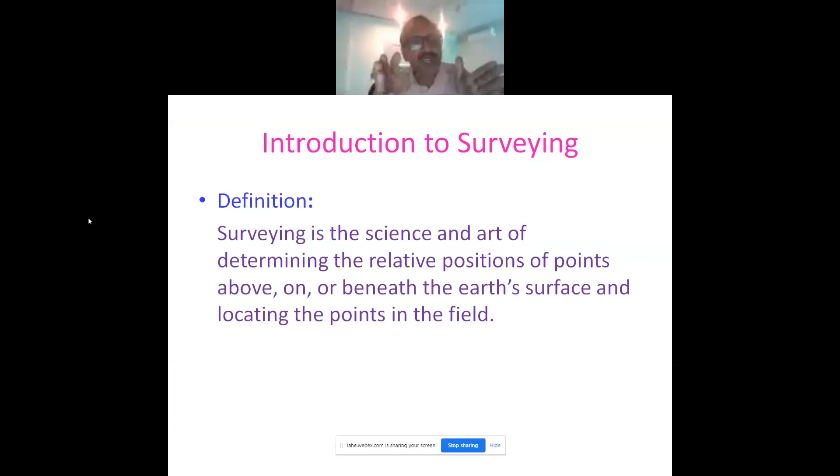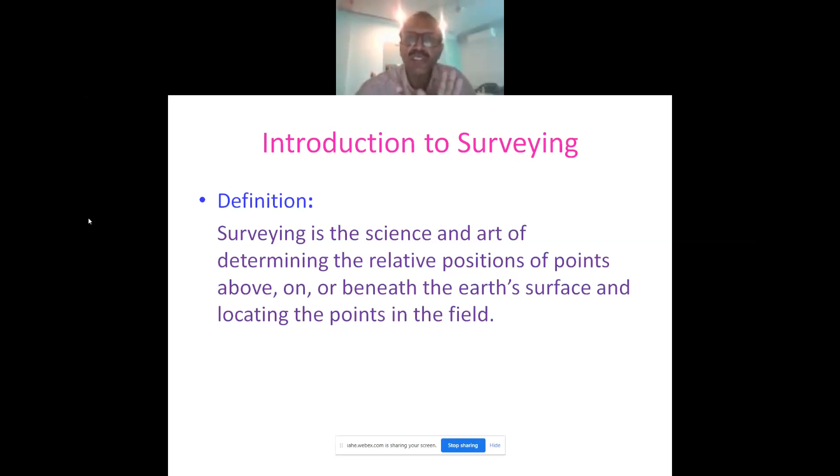If you have done good control points and good topography, your project will go smoothly. If there is a mistake in your control points and your topography, your project will always be delayed, because if you have not done proper control points, your alignment will be changed. And if the alignment is changed, the land acquisition will need to be changed, the cutting of trees will need to be changed, electrical lines will need to be moved from one place to another. So many things will be delayed in the project. So if you have done good control points, your alignment will go smoothly.

If you have done good topography in the field, good topography means you have collected each and every field factor. Otherwise you have to change the alignment, you have to reroute the road. So this way, if you have done good topography, meaning you have collected each and everything from the ground, your design will be very perfect, so your project will go smoothly.

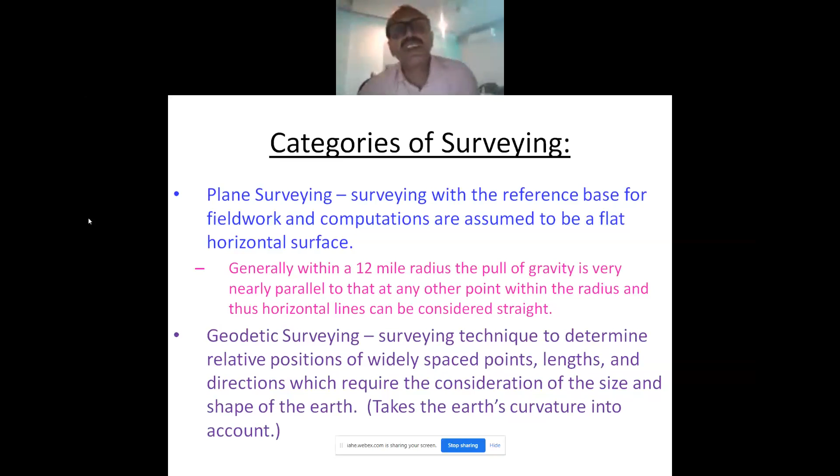Survey methods: there are a few survey methods. One is photogrammetry. Photogrammetry means we have to take the photograph from two different directions. Both photographs overlap each other, then you will get the 3D impact of your area. So you will get the 3D picture. 3D picture means you will get the X, Y and elevation.

When both images overlap by 60 percent. This function comes from the human eye, because humans have two eyes. If you see through one eye, you will not get the 3D picture. But if you see with both eyes, then you will get the 3D picture, because one eye will take one photograph, the second eye will take the second photograph, and both will overlap each other.

3D. Same way in photogrammetry, in earlier days we were taking the photograph from the aeroplane and then overlapping it and then making the drawing. But nowadays we are taking these from the satellite. So we take the image from the satellite, the second image from a different direction. Both are overlapped, then we will get the 3D position. So this is called photogrammetry. We are taking the photographs.

Next is the boundary survey. This boundary survey is normally to collect the boundary points of each property holder. Like when we are doing the topography, when we are doing the DPR, we have to collect all boundary points of each owner. So we will get the area of that. Like if I collect the 7 points of IHE, we will get the area of IHE, that this much area IHE is having.

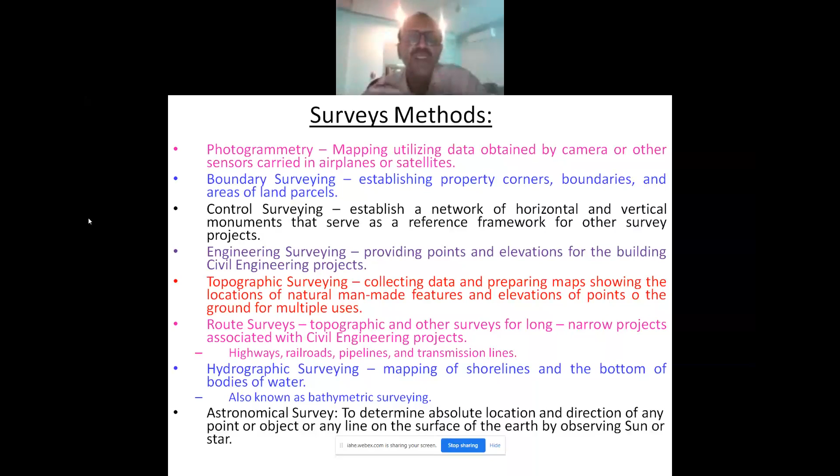The horizontal accuracy in the survey: in static survey by DGPS, accuracy of 5 mm plus 0.5 ppm times base length can be achieved. In traverse survey by total station, accuracy of 2 mm plus 2 ppm can be achieved with a 1 second total station instrument. GPS I need not explain much, because it is a distance error. Say at 5 kilometers, you have two control points at 0 and two control points at 5 kilometers, so the distance between these control points is 5 kilometers.

So in DGPS we achieve 5 mm plus 0.5 ppm. At 1 kilometer it is 5.5 mm, after 2 kilometers it adds 1 mm, at 3 kilometers 1.5 mm, and so on to 5 kilometers. The maximum error can be 7.5 mm. So your DGPS is more accurate.

But in total station, the accuracy differs, because a total station has two types of instrument: one is the EDM, the second is the theodolite, and their accuracies are different. The EDM, electronic distance measuring unit, accuracy is 2 mm plus 2 ppm. The 2 mm is the constant value: centering error, leveling error, mechanical error of the instrument. So 2 mm is the constant of the EDM, and 2 ppm is 2 parts per million, 2 mm per kilometer.

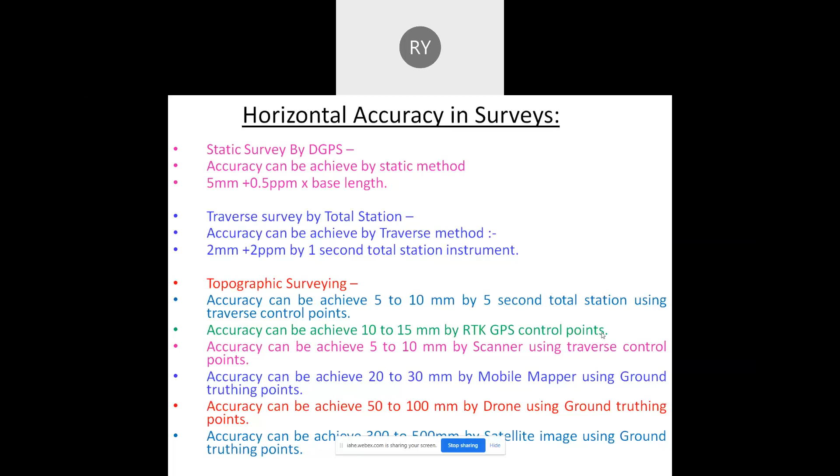Ground truthing points. Ground truthing means you have a control point, every 1 kilometer you have a control point. Whenever you are doing image rectification, you have a control point, you assign that control point value, and all your images will be corrected. Same way in the mobile mapper, you should have a control point. When the mobile mapper has collected the data, you can define that control point value, and your accuracy will be 20 to 30 mm. Same way your scanner: when you scan the area, if you have control points, you can use those control points. Your accuracy can be 5 to 10 mm.

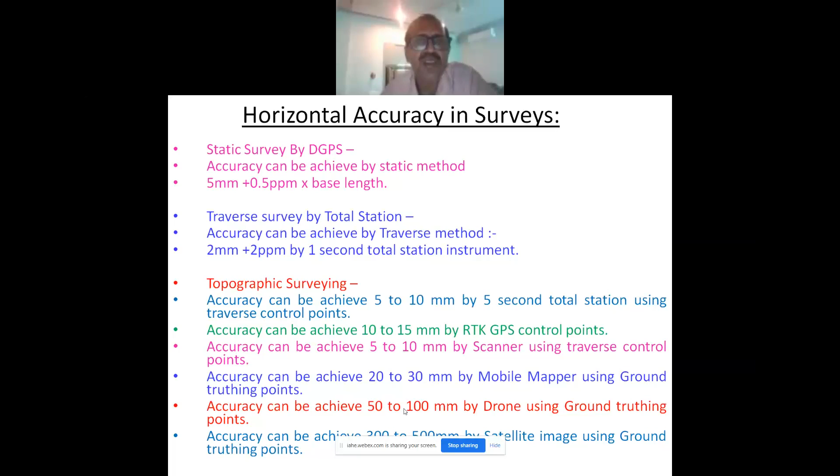So vertical accuracy in the static survey by DGPS instrument can be achieved as 5 mm plus 1 ppm times base length. That means in horizontal control it is 7.5 mm, but in vertical control it is 10 mm in 5 kilometers. But for vertical control, you should run at least 4 to 6 hours of observation. For horizontal control, 1 hour of static observation is sufficient, but vertical control requires at least 4 to 6 hours.

For fly leveling by auto level or digital level, the accuracy can be 2 mm or better, as per requirement or instrument. Like if your instrument has 2 mm accuracy, you will get 2 mm accuracy. If your instrument has 0.7 mm accuracy, you will get 0.7 mm accuracy. So it depends upon your instruments.

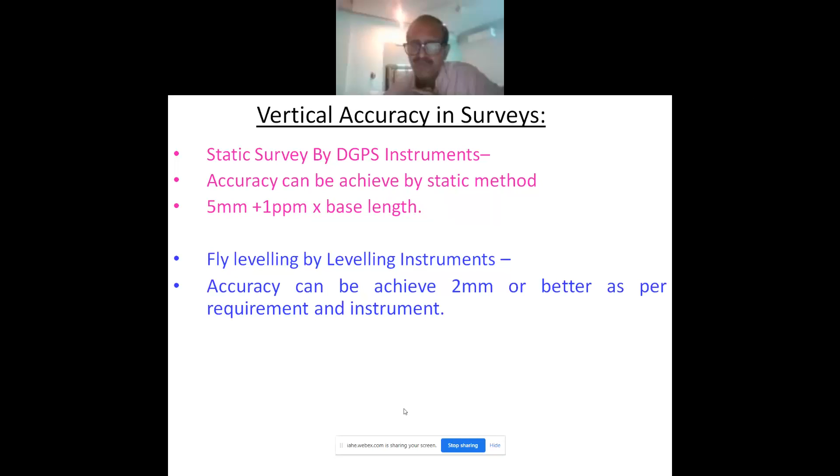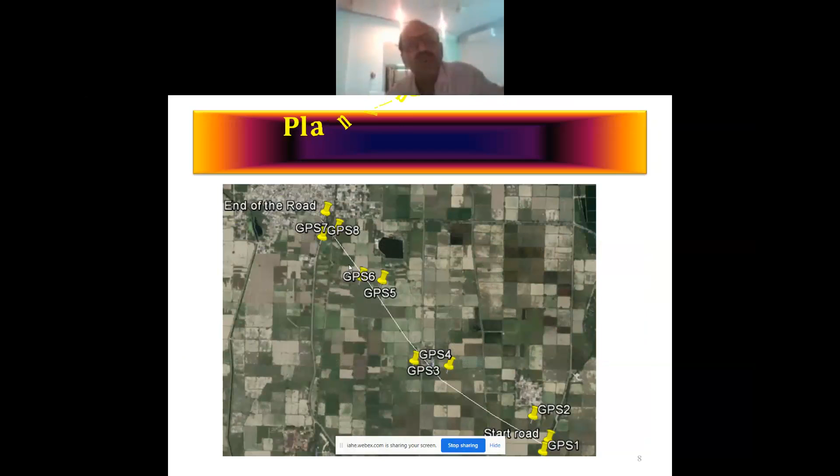For that purpose, we have just roughly aligned this on Google. Then we can recce this on the ground. Then we make a control point, like a GPS control point every 5 kilometers: 0 chainage is 1 and 2, 5 kilometer chainage 3 and 4, 10 kilometer 5 and 6, and 15 kilometer 7 and 8. Likewise, we can design the horizontal control points.

When we have designed these horizontal control points, then we can plan how to do the horizontal control, because we have two types of method, traverse method and triangulation method. So we run with the triangulation method. 1 and 2 are GPS, this is a temporary point. So we make this triangle 3, 4, 1, 2 and T point, then T1 to T2 this triangle, then 5, 6 to T2 this triangulation, then T2 to 5, 6, T2, T3, then T3 to 7, 8 and 5, 6.

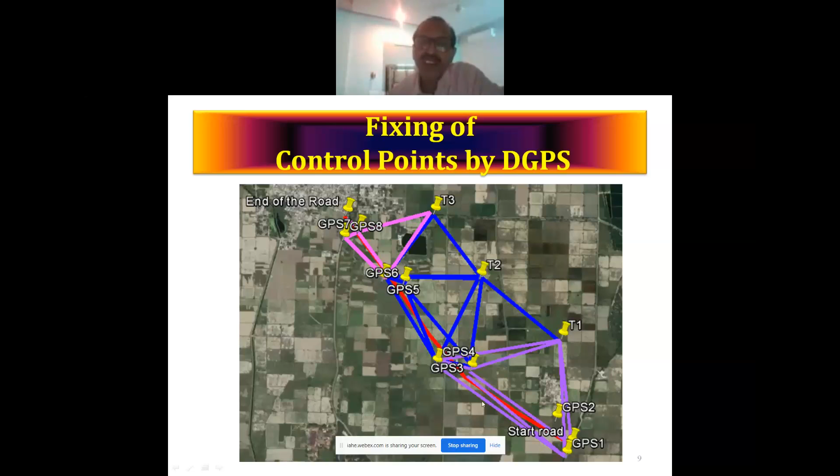If you make this triangle, your alignment will not move left or right, because this will not allow it to go out and go in. So your horizontal control is very accurate. With respect to these control points, now we run the traverse in between these points with the help of a total station. So we run that; these are the traverse points.

Now we have TS2 and TS3 as control points on the ground. We mark something; likewise, here is a bridge. In between TS2 to TS3 is a bridge. So we can use these two control points, and we can mark the center line of your bridge or the center line of your road.

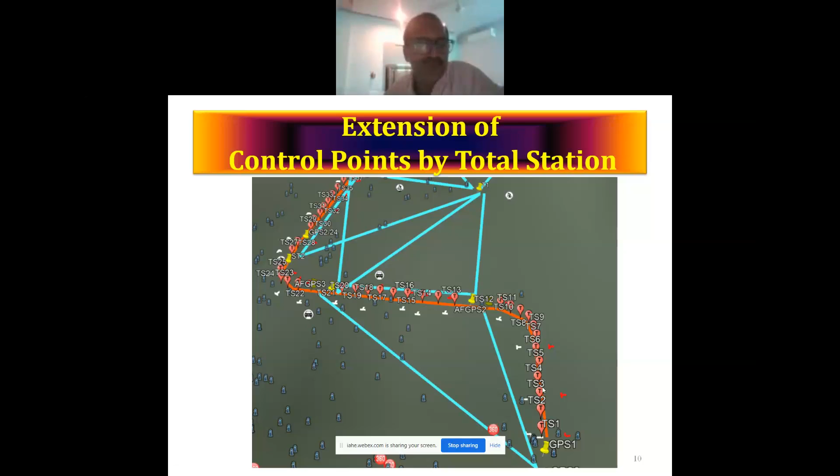Surveying instruments. There are a few survey instruments we are using in the field. In olden days, we were using a chain. Chain is for distance, because in those days we didn't have electronic distance measuring units. So we normally measured the distance with the help of the chain. Then auto level for leveling purposes, theodolite for angle measurement, EDM for distance measurement. The next generation came: theodolite, total station, for measuring the angle and distance.

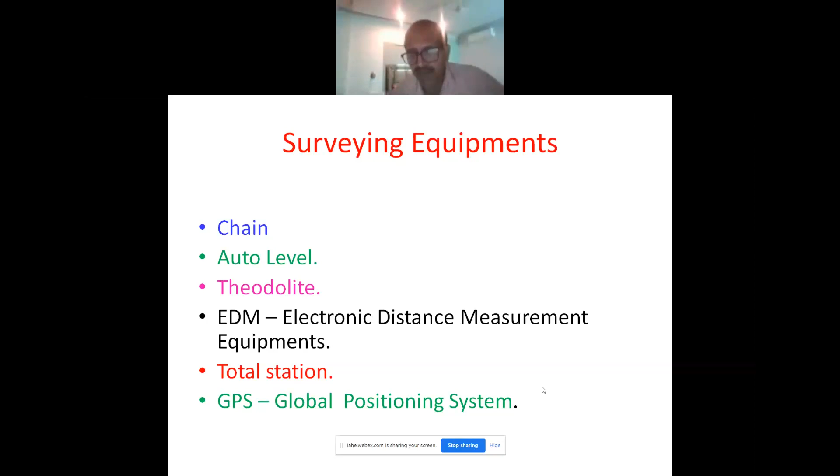Next is the GPS, global positioning system. Next, drone, imagery, mobile mapper, scanner. Many instruments are there. So in olden days, we normally used this chain. The instruments we used were chain, field book, and mapping. Plane table, we do on the plane table. This type of chain is there. We have to measure the distance with the help of this chain.

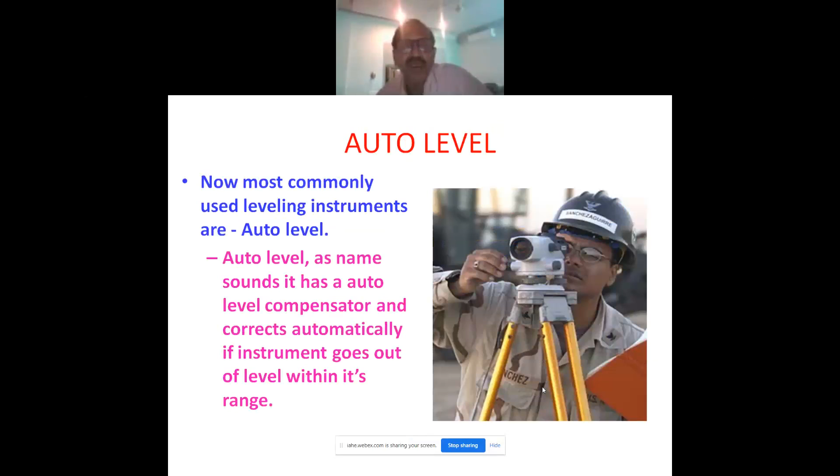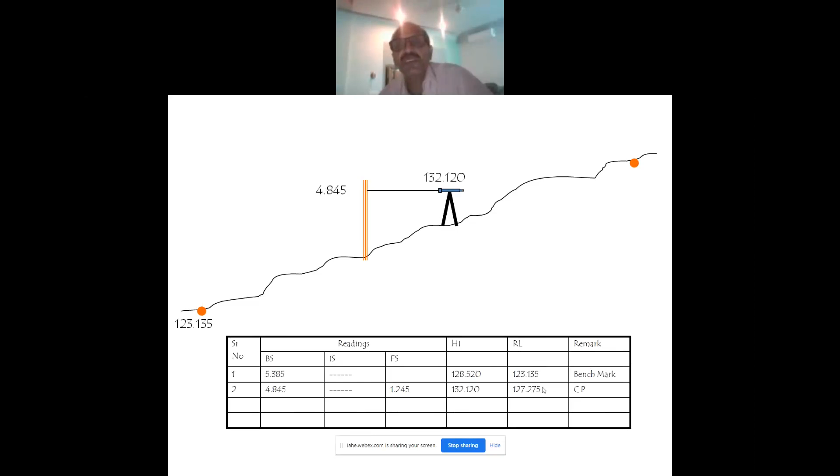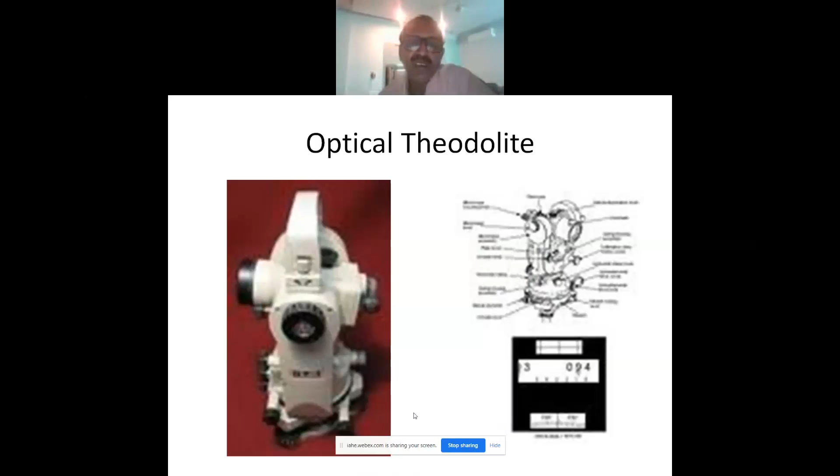Next came the optical theodolite. Optical theodolite means the graduation is inside now. Horizontal and vertical graduation is inside. We can see through optics. Through the optics we see angle, degree, minute, and second. In the vernier theodolite we see through the naked eye, no magnification. But in this optical theodolite we have magnification because we have an eyepiece. So we see through the eyepiece. With this eyepiece we see angle, degree, minute, second. So we can achieve more accuracy in this optical theodolite.

At a later stage we developed the digital theodolite. It means no need to read the circle reading or read through optics. Previously we were seeing through the naked eye, then through the optics, but in the digital theodolite we see the horizontal angle and vertical angle directly on the display itself.

It displays the horizontal angle. When we move it horizontally, it will show the horizontal angle. When we move it vertically, it shows the vertical angle. But till date we normally use the theodolite only for angle measurement. Distance can be measured by using the staff reading: top reading minus bottom reading, times 100, gives the distance, but longer distances are not possible to measure.

So we had EDM technology in those days. In the olden days we had the EDM MRA5, MRA7 system. With those EDMs, first we had to set up the theodolite on the tripod to measure the angle. Then we removed the theodolite and set up the EDM MRA5 or MRA7. We measured the distance with the help of this measuring unit.

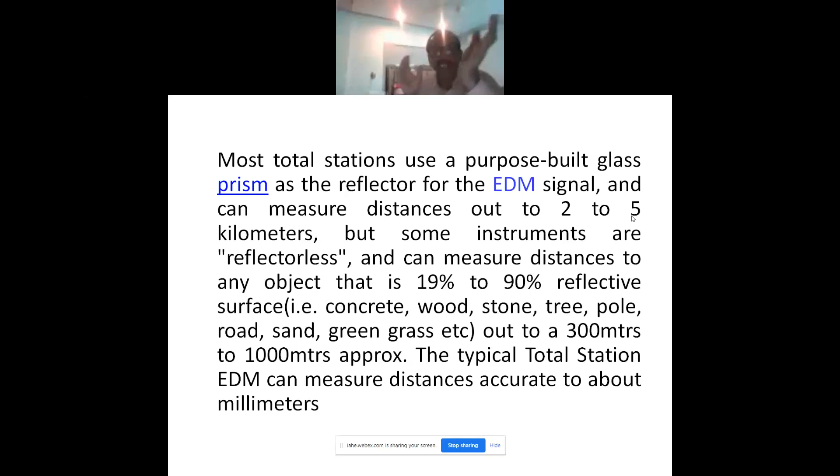In places where a man is not able to go and we are not able to fix up the total station nearby, at 200 meter or 300 meter, we can measure 500 meter also, 1 kilometer also, 2 kilometer also. Like we have the Chenab bridge project in J&K. Kauri to Bakkal is a 1 kilometer distance, but in between is the river. So it is not possible to measure from Kauri to Bakkal or Bakkal to Kauri.

So at that time we used the 2 kilometer reflectorless total station, because when they claim it is 1 kilometer, we can measure 500 meter in the field, because the surface does not give back 100% reflection. Maybe it absorbs the rays. So it is maybe 10%, 20%, 30%. So in that project we used the 2 kilometer total station in reflectorless mode, and we achieved 1 kilometer easily.

So for the EDM, depending upon your accuracy and your requirement, you can use the total station. But for normal field topography survey, we normally use 200 meter with the reflectorless mode. So this is the total station. This total station is the combination of your theodolite. This is the theodolite. No separate EDM. They have fitted the EDM inside the telescope itself. So wherever you are sighting, nowadays the EDM is hitting.

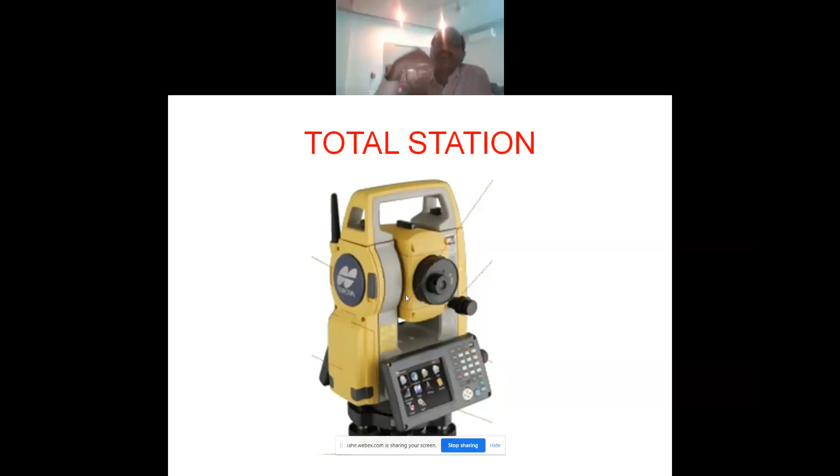Horizontal angle, vertical angle, slope distance, vertical distance, horizontal distance, bearing, northing, easting, elevation, point number, and code. So all these parameters will be saved in the memory. And the next point, number 6, is ready to collect.

Also, if you have a Windows-based processor, you can define the layer, so the same code will save in the same layer. You have to define it once in the total station. It is an electrical pole, EP. So next time whenever you give the EP code, it will go automatically to the electric layer, because for EP you have given the electric layer. Whatever the point number is, 5, 25, 35, or 67, whenever you give code EP, it will go directly to the electric layer.

If a tree is coming, your tree number is 7, 9, 13, 18, whatever number it is, but whenever you give code tree, it will go directly to the vegetation layer. Same for building: BLD1, BLD2, BLD3. Whenever you collect building corner 1, the point number may be 7, 17, 27, but the code is the same, building 1, and it will go to the building layer. So this is the function of a Windows-based processor, that you can store this data in different layers with the 11 parameters in the memory.

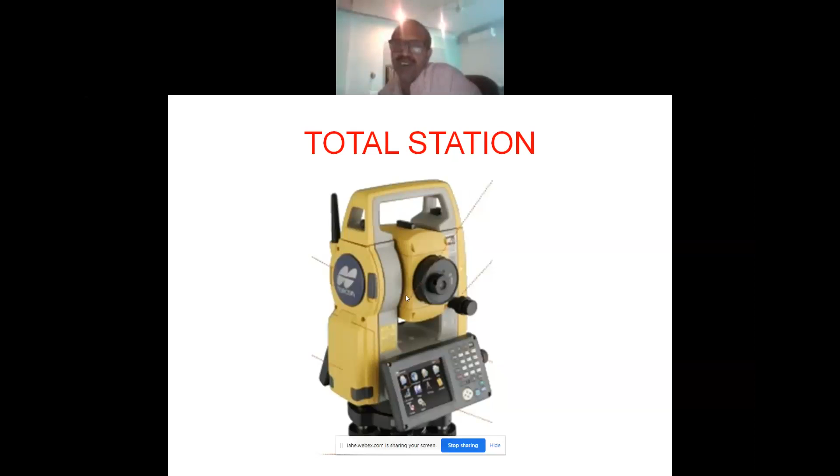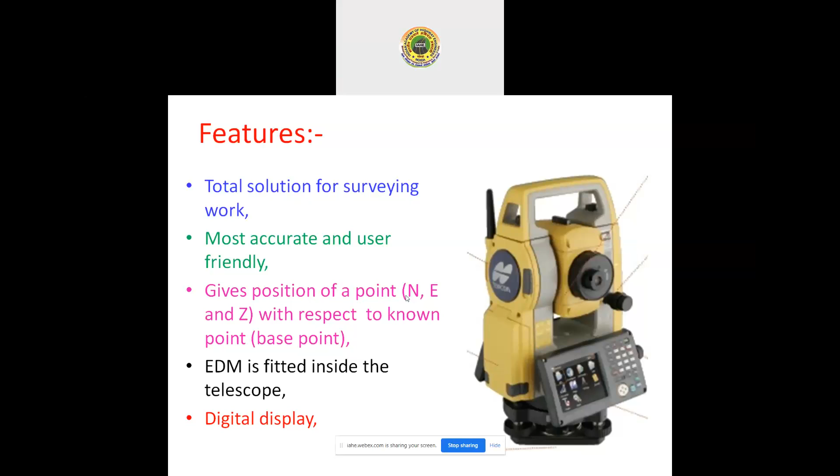Shall we have tea break? जी सर. Okay, what time will all join? सर 11:30 सर. Okay, okay, Neeraj. We will have a tea break, then we can continue.

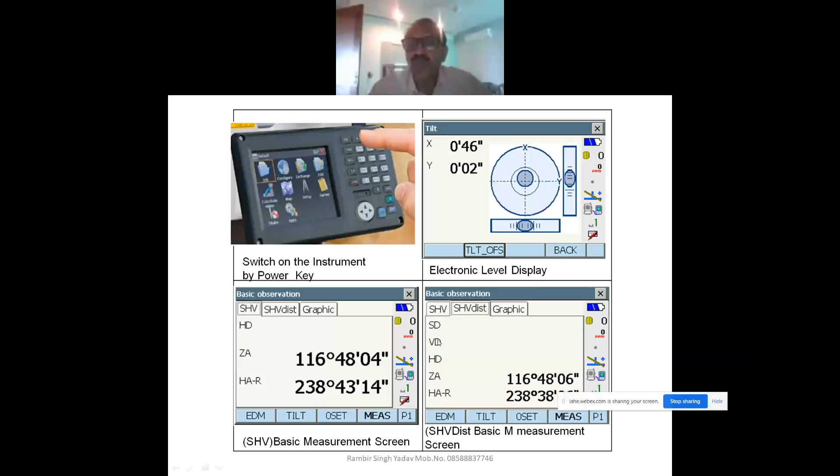So the total station, when it measures horizontal angle and vertical angle, functions as a theodolite. When it measures the distance, it works as an EDM. When it calculates this data, with sine, cos, and tan theta, it functions as a scientific calculator. And then it is recorded in the memory, so it functions as a computer. So it is a combination of theodolite, EDM, scientific calculator, and computer. All four things become one. That becomes a total station.

So total means theodolite is not required, EDM is not required, scientific calculator is not required, and computer is not required. Everything can be done by the one instrument. That is called total station. So total solution of surveying work, all survey work can be done by the total station. Most accurate and user friendly, means the accuracy is very high. It measures 1 second angularly and 2 mm plus 2 ppm EDM.

Then it directly gives the position northing, easting, and Z with respect to the base point where the instrument is. With respect to that, it will give you directly northing, easting, Z. No need to calculate everything. In older days, we were calculating because at that time we didn't have a scientific calculator also. We had only a theodolite and a separate EDM.